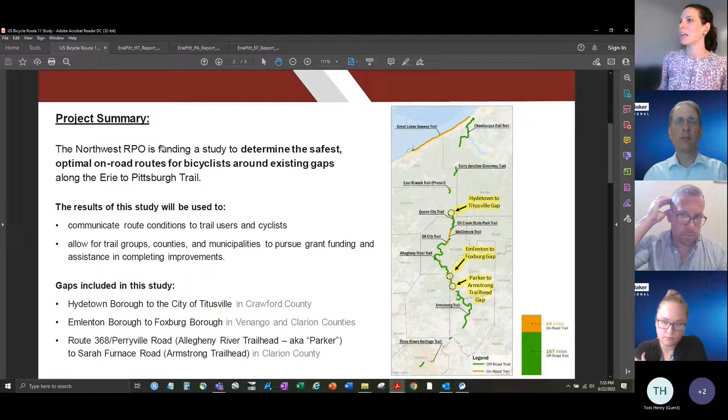For the meeting today, we are going to be sharing the final concepts for the project and hearing your questions or thoughts on those final concepts. We'll talk through the reports we've put together for each section, discuss the concepts, and then open it up for your questions. After we're done walking through the three reports, I will circle back and talk about next steps for the project so everybody has line of sight of what that will be.

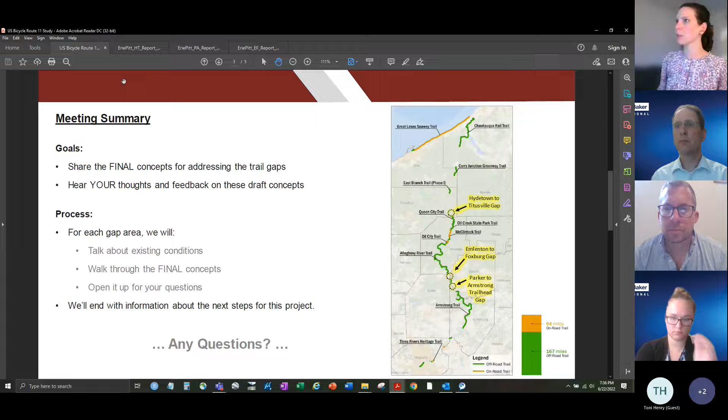With that, we are going to start with the Emlenton to Foxburg section. For each of the projects, I'm going to walk through a high-level summary of each report so you know what's included, what information and resources will be available once everything is finalized, and then I will walk through the actual final concepts in more detail.

The report starts with an introduction of the project, some background information, and maps to help locate people to the area we're talking about. Then it moves into a summary of the data collection that was done, the engagement process of the stakeholder team, and the public involvement pieces involved in the project. Then it dives into the existing conditions.

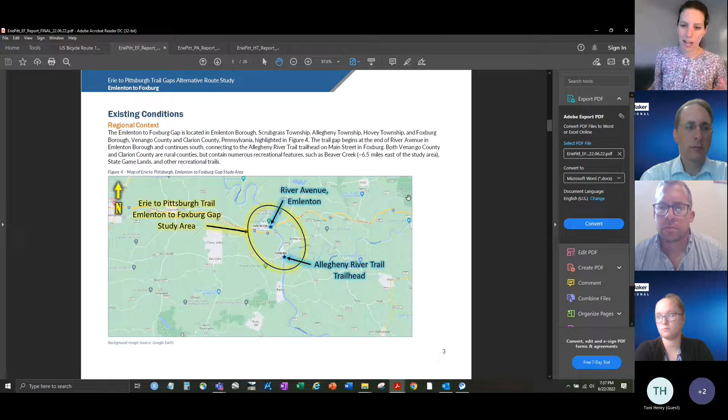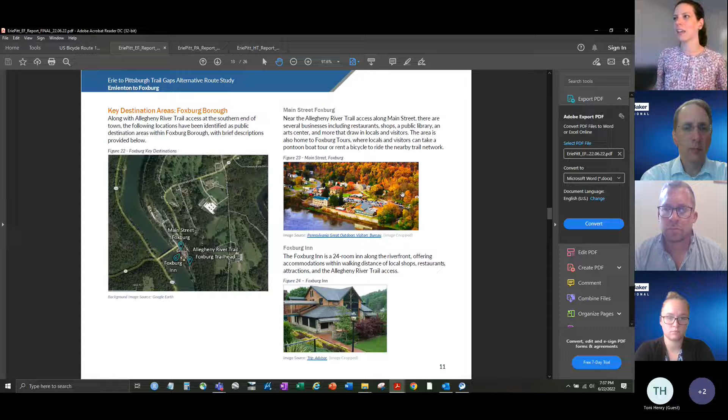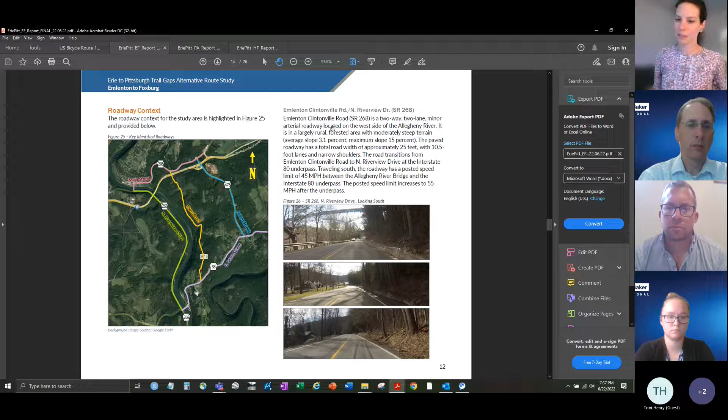This includes the regional context, the land use context in the area, the trail context itself, the specific pieces for the trails in the area, as well as key destination areas in both Emlenton Borough and Foxburg Borough. It also lays out the roadway context for the roadways in that gap area, with a description and pictures of the roadways to document existing conditions.

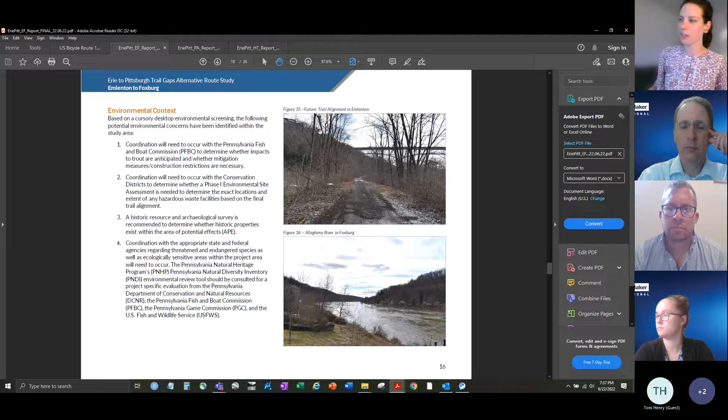There's also a description of the bridge context in this area, as well as the general environmental context for potential environmental concerns. It also lays out the property boundaries, with graphics and screenshots from online property boundary data. We also provide a summary of safety data and observations based on what's publicly available from the PennDOT reportable crash data.

And then, as noted, we then dive into the conceptual alternative. So for this part of the report, I'm going to talk in a little more detail.

For this Emlenton to Foxburg gap, there are two primary on-road options based on the roadways out there. You can either go on the eastern side of the Allegheny River, or the western side. As shown in the graphics, those two concepts on the eastern and western sides are listed as not recommended. I'll get into that once we start walking through the specifics, which is why we've also come up with Concept C, an off-road option.

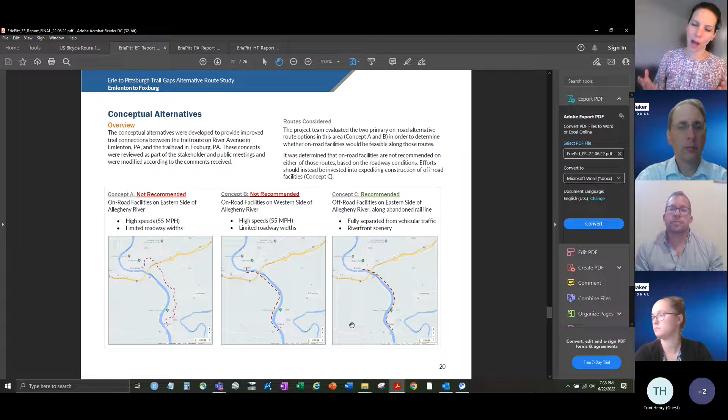Let me walk through why we've listed it that way. For Concept A, which travels along the eastern side of the Allegheny River, it would go along Main Street, SR 208, up to Metz Road, and then down SR 58. This route has rolling hills, rural scenery. However, the roads within that section, particularly SR 208, have higher speeds, 55 miles per hour, and limited roadway width.

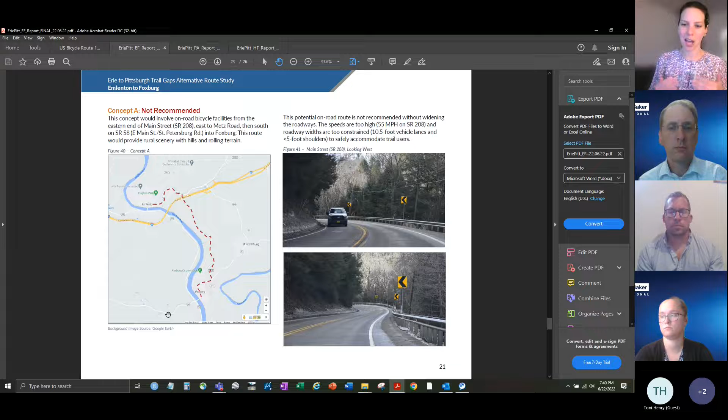Based on those conditions, in our expert opinion, we believe it is not safe and would not recommend that option without widening the roadway in some way, which would be extremely expensive based on the terrain in this area. That is the reason this route is not recommended. You can see in the pictures it's very constrained, with hills, guide rail, big drops — not recommended.

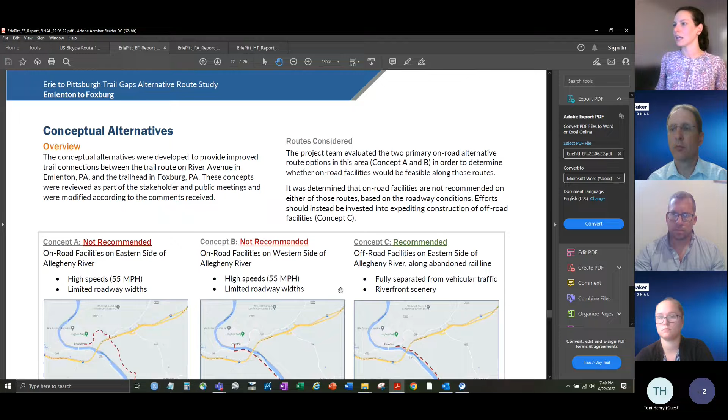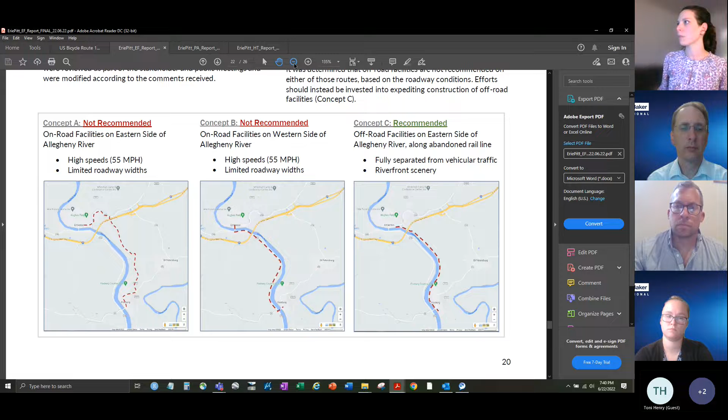The other route option — that graphic needs to be updated, apologies, we'll get that cleared up — the second route option travels along the western side of the Allegheny River and up to Foxburg. On that portion, pictures here of SR 268 show once again higher speeds, limited roadway width, and constrained conditions — not recommended for on-road facilities.

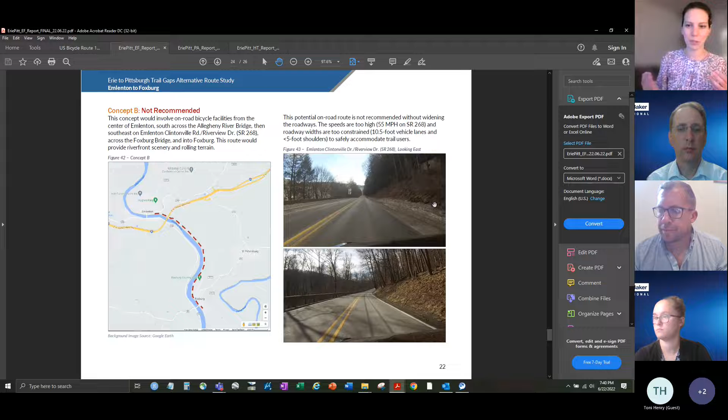So those are the two on-road options, which are not recommended, hence why we've come up with Concept C — that the trail groups, municipalities, and counties should continue to pursue that off-road route option. Here are some pictures of the route it would go, which basically follows along the river. For this one, we've identified a high-level, conceptual planning-level cost estimate of what it might look like, as well as some implementation steps.

As you can probably imagine, and this is what we heard from the stakeholder team as well, there are some property negotiation issues around whether the abandoned rail bed has reverted back to the existing property owners. That is the critical path for implementing that off-road option — resolving those property negotiation issues. But the recommendation, based on the on-road facilities being the other two options, is to continue with that and make it the priority, to push through those implementations. Any questions related to the Emlenton to Foxburg concepts that were presented?

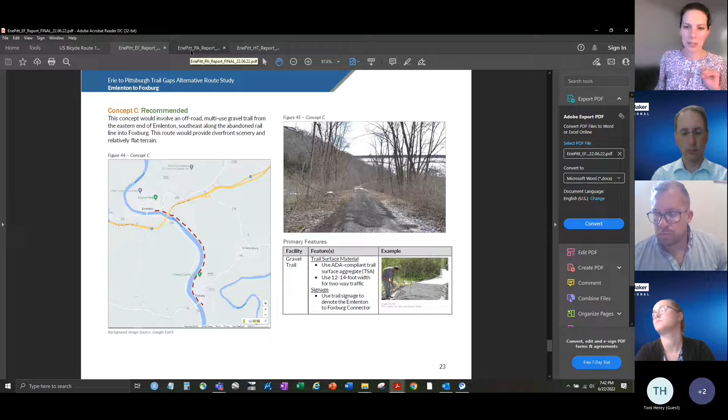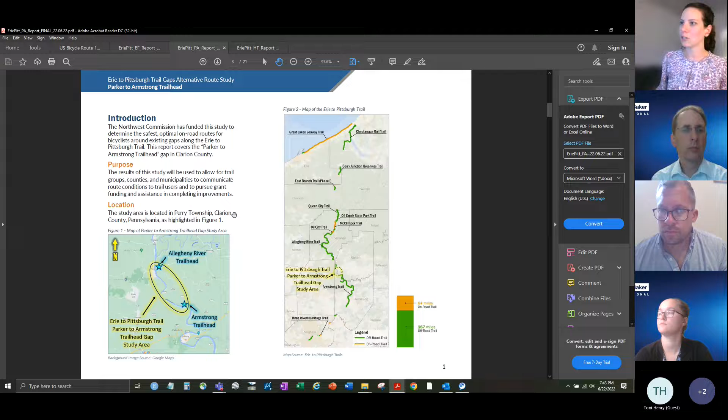For the Parker to Armstrong Trailhead section, I will once again walk through the report and then talk in detail about the concepts we developed there. You'll note the layout of the report is very similar to the others — we start with an introduction, some background information, location information, a summary of the data collection, stakeholder team involvement, public involvement, and then we dive into existing conditions: regional context, land use context, trail context, which would be very similar.

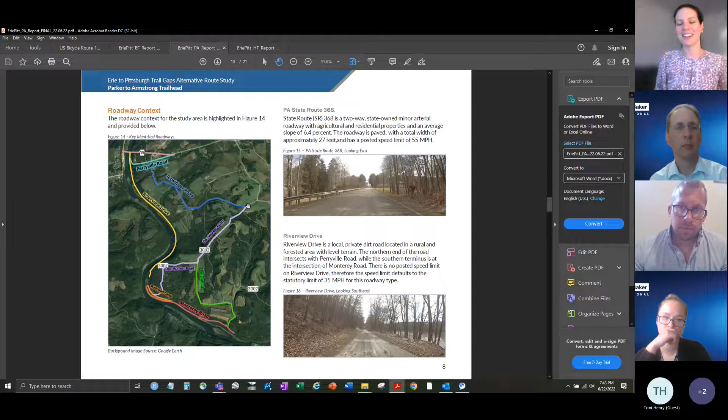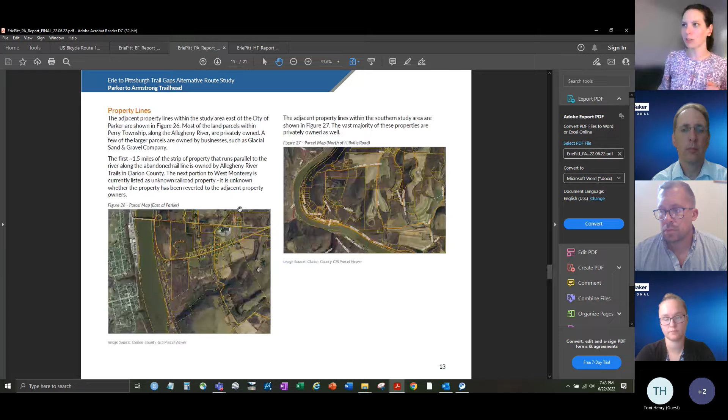The roadway context for the area, pictures of all the roads out there, including the bridge context over the trailhead, environmental context, property line, safety data and observations, and then we dive into the conceptual alternative.

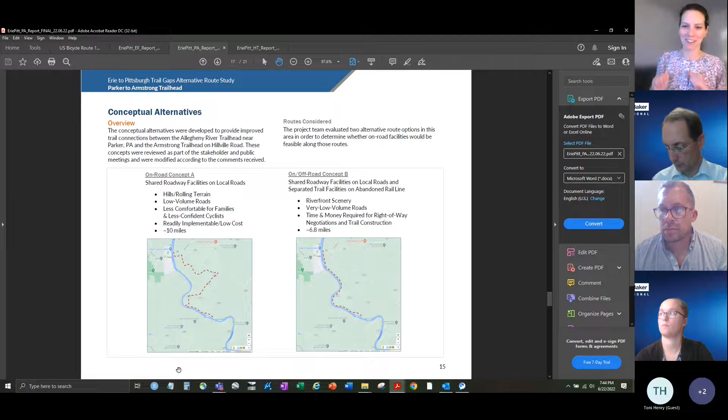So for this Parker or Allegheny River Trailhead to Armstrong Trailhead section, it essentially is looking to connect the Allegheny River Trailhead to the Armstrong Trailhead down here. We've come up with two on/off-road concepts for this. The first one is traveling along the river here, along River Drive.

There is a portion of the property for this railroad that is now a roadway that is at least listed on the online property parcel identifier to be owned by the Allegheny River Trails of Clarion County. So a portion of it is sort of taken care of.

However, from about here all the way down to here, there's an abandoned railroad bed. And once again, the property negotiation, property rights have not yet been finalized or determined, whether it's reverted back to property owners. And then there's a portion here leading in from the end of that abandoned rail line that would pass through private property owners, so obviously there would be some property negotiations for that. And then it would jump back onto the roadway segment, so Monterey Road.

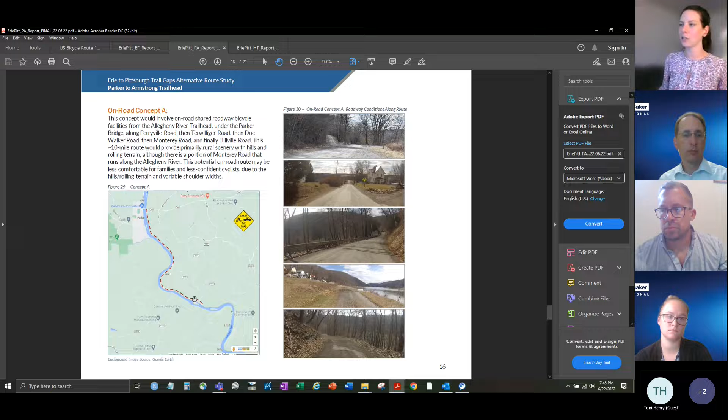As you can imagine, this particular concept would provide—apologies, pictures here—would provide an along-the-river route that would go through that area. The other concept... Jennifer, yes.

Jennifer, this is Kim Harris. And just before we get too far and I forget, the property, the section that's owned, it's owned by the Allegheny Valley Trails Association, not the Allegheny River Trails in Clarion County.

Okay, appreciate that, Kim. So the parcel viewer online must have the wrong thing. Yeah, it should say Allegheny Valley Trails Association, I'm almost positive on that. Okay, appreciate that additional feedback. Yeah, I received some comments from, I think, Ron Steffi, that it was Allegheny River Trails of Clarion County, so we might need to track that one down a little bit more. But okay, yeah.

But either way, it is a trail organization that owns that particular portion. So this route travels along the river, and as you can imagine, provides that rural, lovely riverfront scenery, right? And would be a much more level terrain than the other option—apologies for the errors in concepts.

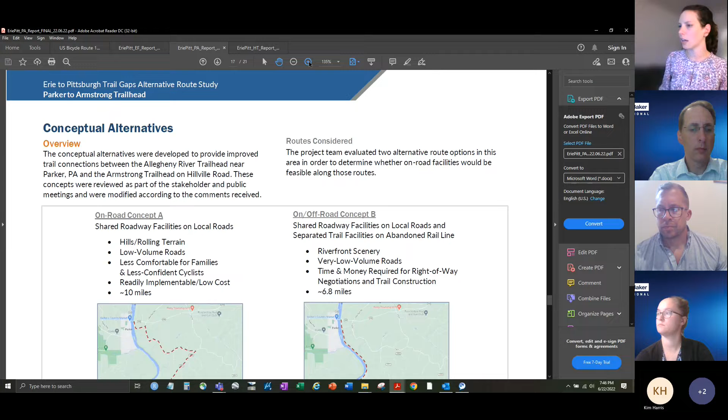Travis, I will make sure I get some updated copies to you, to the stakeholders. The other route travels up into the hills, up on the roadway.

So this is the on-road concept. It travels up along these windy roads, and then back down, and then up onto Monterey. As you can probably imagine, this one is a little less direct, a little more hilly, but for these on-road options, it wouldn't require additional right-of-way negotiations, which is a huge pro for the implementation of this one.

Plan would be to implement a shared roadway facility. So what would that mean? It would look like signs posted along this segment that would have share-the-road signage with bicyclists and vehicles on there. So relatively inexpensive, quicker implementation, let's say, than the other option.

So for each of those two concepts that we've put together, we've also included high-level cost estimates, as well as general considerations, what would need to be part of that, and then the implementation steps for either of those. As I alluded to when I first started this report, we don't provide a recommended option. We wanted to make sure and leave the flexibility for the trail groups, the counties, municipalities, to make the choice that makes the most sense based on their interests and strategic implementation, how they'd like to move that forward. But we wanted to include both concepts so that options are available to them.

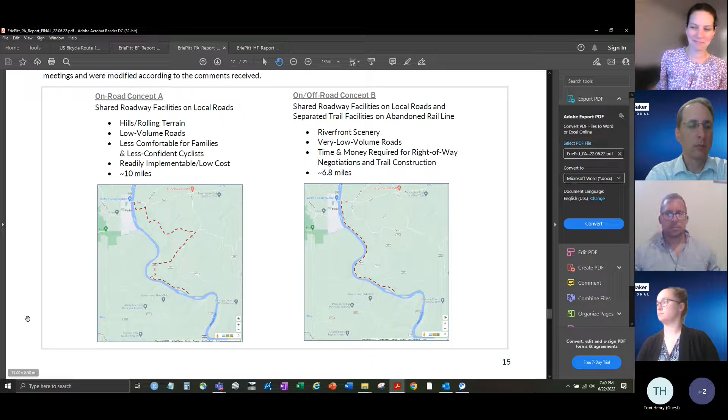All right, then we'll walk through our last report here. So the final segment is the Hydetown to Titusville segment. Once again, I'll give a quick summary of the report and then I'll dig into the concept.

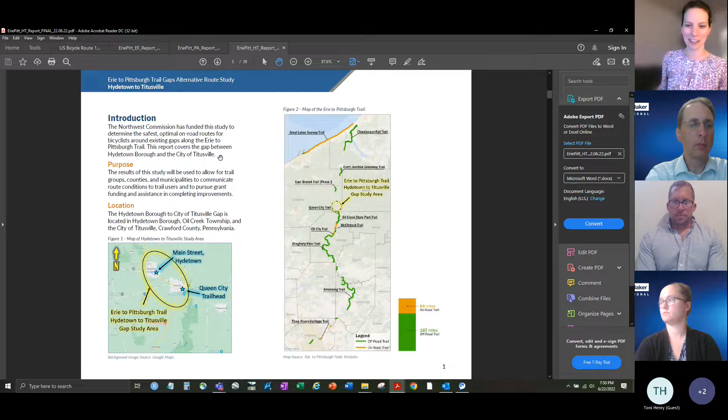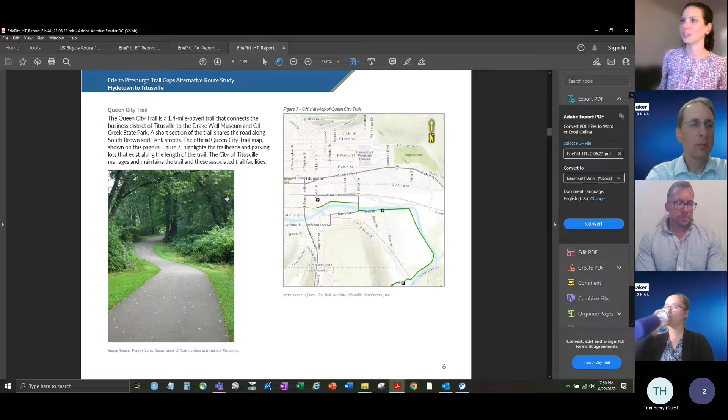So once again, it starts with an introduction, location information. We go through the data collection, stakeholder team, public involvement. Dive into the existing conditions, the context, land use, trails in the area, key destination areas in both Hydetown and Titusville, as well as the roadway context for the roads in that area. Lovely pictures, descriptions, right?

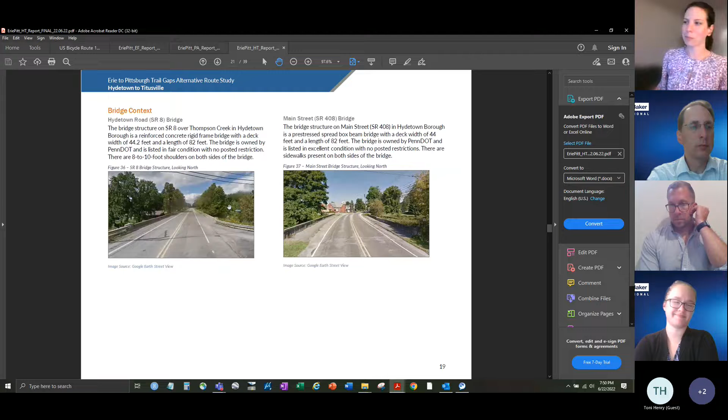And quite a few in this one, and then a couple bridges in the area. The environmental context of potential environmental concerns based on the concepts, and the property boundaries, and safety data and observation.

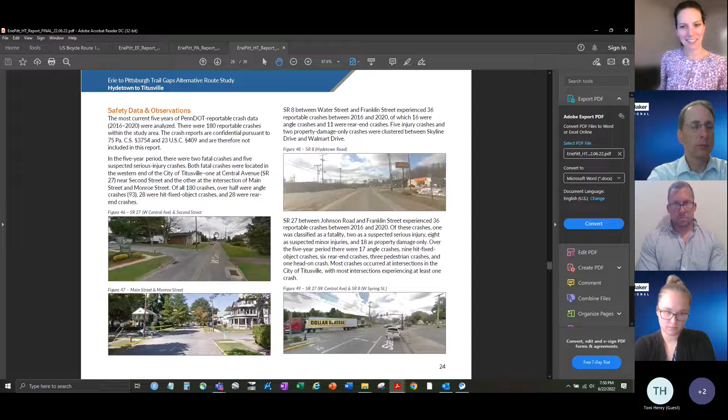All right, and then we dive into the conceptual alternative. So for this segment, we have two overarching conceptual routes to connect Titusville to Hydetown, Hydetown to Titusville. For each of those, there are two options for the segment on SR8, and I'll walk you through that. But from a high-level perspective...

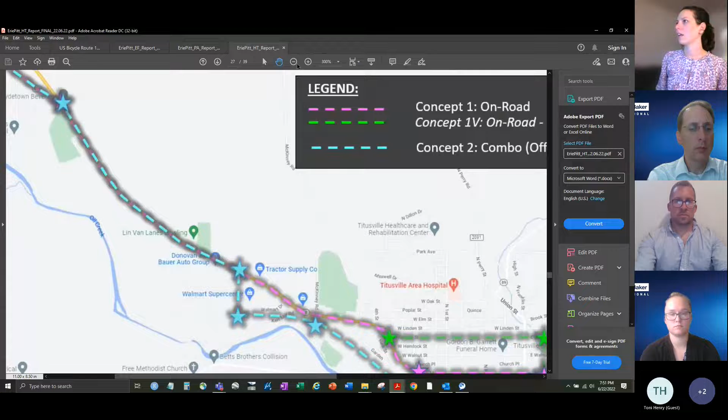Thanks for your patience, everyone, there we go. From a high-level perspective, the two routes are Concept 1, which is an on-road facility through the town of Titusville, along SR8, up to SR408, into Hydetown. The second concept is a combination of off-road and on-road facility. This one would travel alongside the railroad line and then along the abandoned rail line, up to the road behind Walmart, hop up the road, and then be on SR8 for the rest of the way, and SR408 into town. So those are the two overarching concept routes.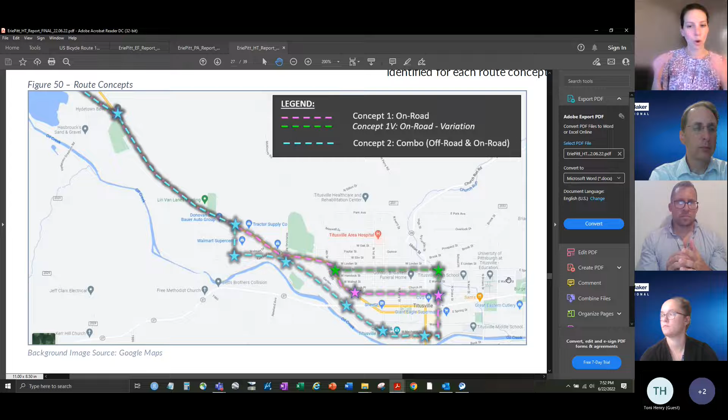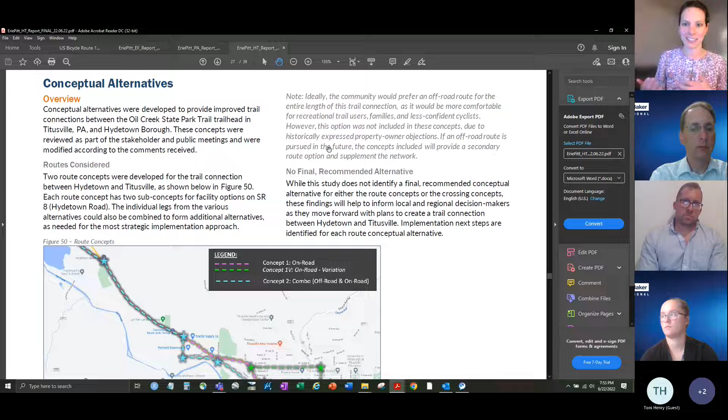We do include a note that ideally, based on what we heard from our stakeholder team, the community would prefer an off-road route for the entire length of this trail connection, as it would be more comfortable for those recreational trail users, families, etc. It was not included in the concept routes because there's been some historically expressed property owner issues for a portion of that segment. But in the future, these two on-road/off-road concepts could serve as supplemental routes for the overall transportation network. If we're thinking about the active transportation network, having multiple parallel routes can be really helpful and provide different access opportunities. Just want to make sure I note that.

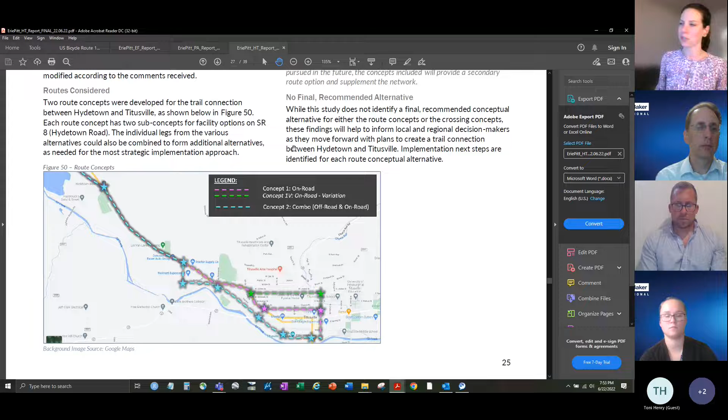All right, so with that, I'm now going to dive into what those two concepts and the options that go with them actually are. On to the next.

All right, so the first one, 1A, this is once again the on-road option. So it would travel as a shared road facility. This would look like sharrows, little bicycles with arrow pavement markings on the roadway, with shared roadway signage right up through town. This segment is already noted, the light blue turquoisey is already there based on the Queen City Trail signage that's there.

We've also provided an alternate parallel route up along this roadway, Spruce Street, which would provide a quieter roadway experience compared to the main street that is currently noted. Either way, both of those routes, once you come through town, would then transition along SR8, this first portion here, as a shoulder bike lane facility. Then once you hit this roadway here, it would then transition to a buffered bike lane up to SR408, and then turn into a sharrow facility, so once again a shared roadway.

So what are some graphics to go along with that? We've got, this is the shoulder bike lane segment, right? The lanes would be reduced to 10 feet. You'd have a delineation, the shoulder bike lanes would be on either side.

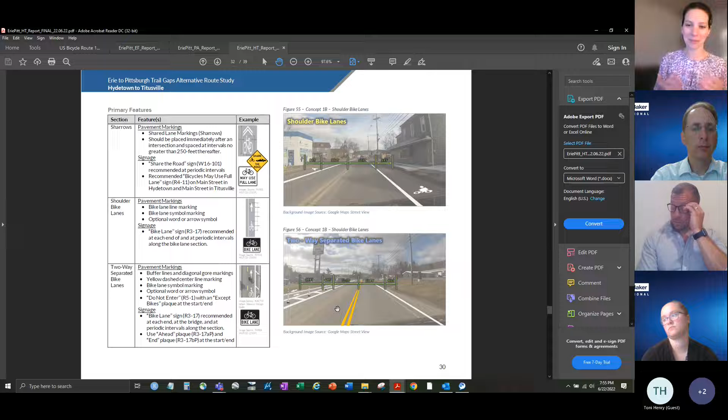For 1B, it is the same route. The only difference is what's being done along SR8. Instead of being a buffered bike lane, it's a two-way separated bike lane on one side of the roadway. So instead of having a bike lane on each side, you have two bike lanes traveling in opposite directions on the southwestern side of SR8. This would involve shifting the lanes currently on the roadway, restriping pavement, as well as the addition of delineators - those tubes you can put out to provide an additional buffer between the vehicles.

For either of those options, there will need to be thoughtful designs at the driveways and the intersections for the side roads along this section. We don't provide specifics on those design details, but we do say these absolutely need to be a part of the design moving forward if these options are selected.

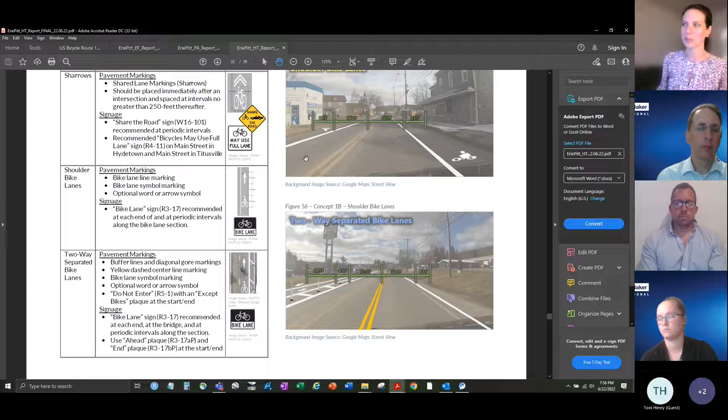All right, so that's 1A, 1B. We move along to concept 2A. You will see that it follows along the railroad and the abandoned rail line until we get to the road behind the Walmart. Then it transitions to a shared roadway facility up that little road to SR8. For 2A, we have the buffered bike lanes on SR8, and then a shared roadway into Hydetown.

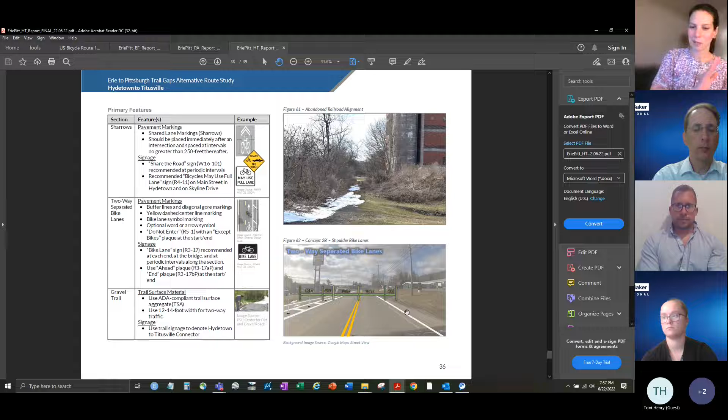So what would that look like? It would be a gravel trail along that abandoned rail line area, and then buffered bike lanes on SR8. Concept 2B is the same route for the first part, and then a two-way separated bike lane on SR8 - similar concept of having two-way separated bike lanes on the southwestern side of the road.

All right, so those are the four concepts that we put together for this project. Are there any questions related to those four concepts?

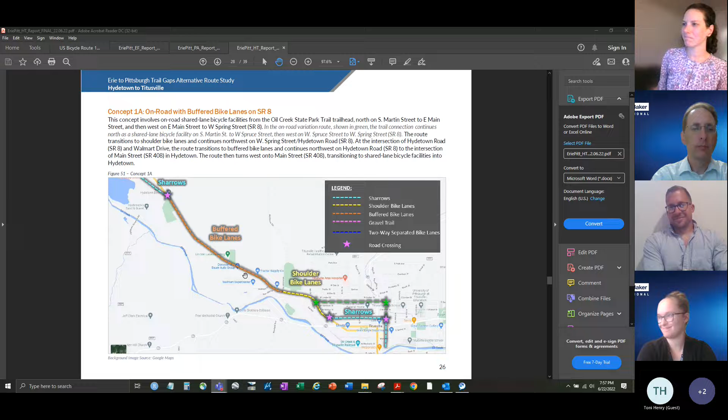No concept or no questions? So once again, very similar to the Armstrong project, we don't provide a recommended option. We simply say, here are four concepts, four options to choose from, to provide ultimately the greatest flexibility for those entities who are interested in moving this forward.

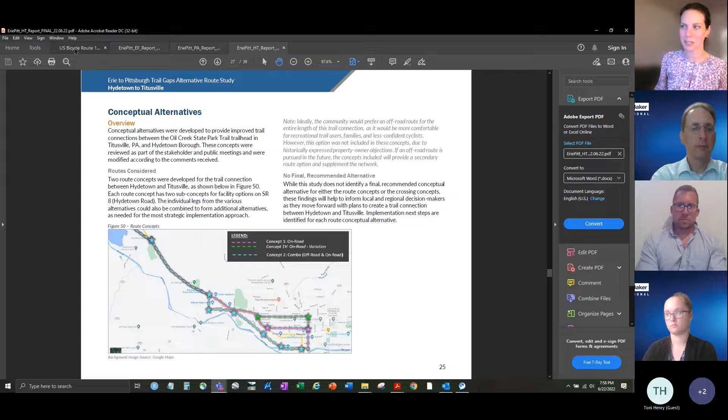All right, so with that, that is the conclusion of the summary of the three reports that we have for this project. I am now going to jump into the next steps conversation. So what happens next with these reports?

Once I get those figures updated that clearly have a quick error there, we'll get those updated, and then we will send those along to the Northwest Commission's Transportation Advisory Committee, the TAC, for them to review in advance of their June 28th meeting. Our team will be presenting the outcomes and the final concepts from these reports at that meeting.

The hope is that then the reports are approved, studies are approved. Once that is done, we will upload the final reports to the project website, and the various planning entities then have it for them to be able to carry it forward and move forward with the next steps for implementation. Any questions around the next steps for this project?